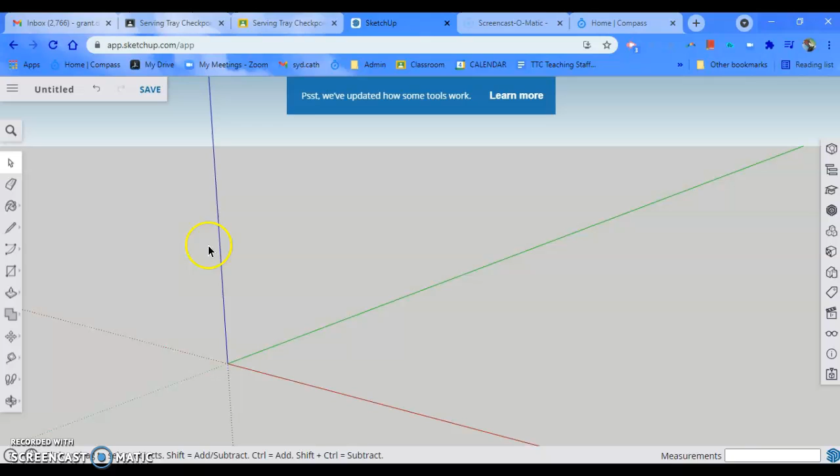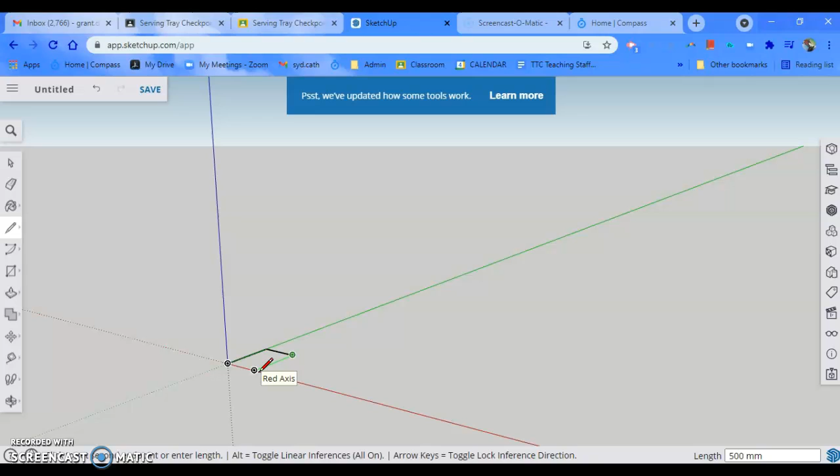We're going to draw a line first, and we'll say that's 500 long, enter. We'll make it 360 wide. You can see the line I've drawn is green, which means it's parallel to the axis, and I can draw that there.

Now I'm sliding my mouse button, but you could alternatively find zoom over here to do that. So, the base is going to be plywood, and it's going to be 3 millimeters. I'm typing in the 3 and pressing enter.

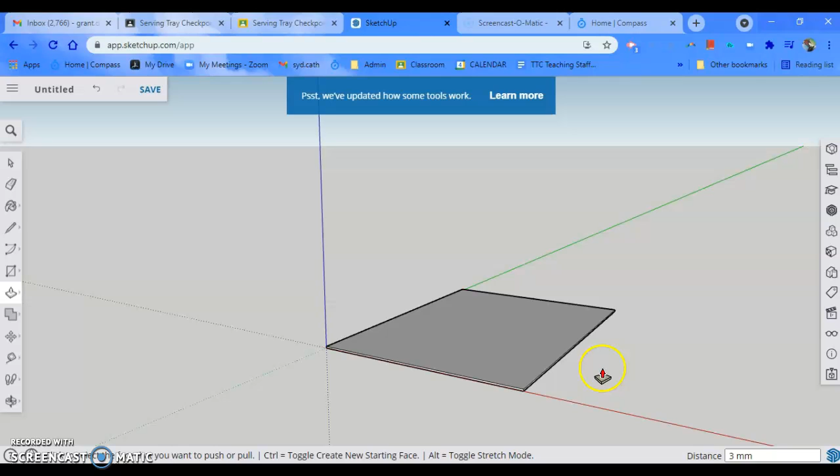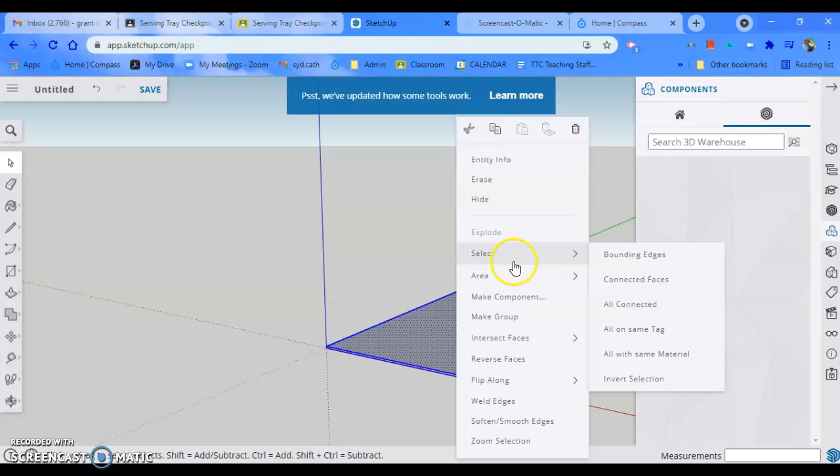Now I'm going to select all of that, right click on my mouse and make a component, and I'll call that the base. By doing that, it means that when I draw on top of it, the things I draw won't stick to it. I can draw separate bits and pieces.

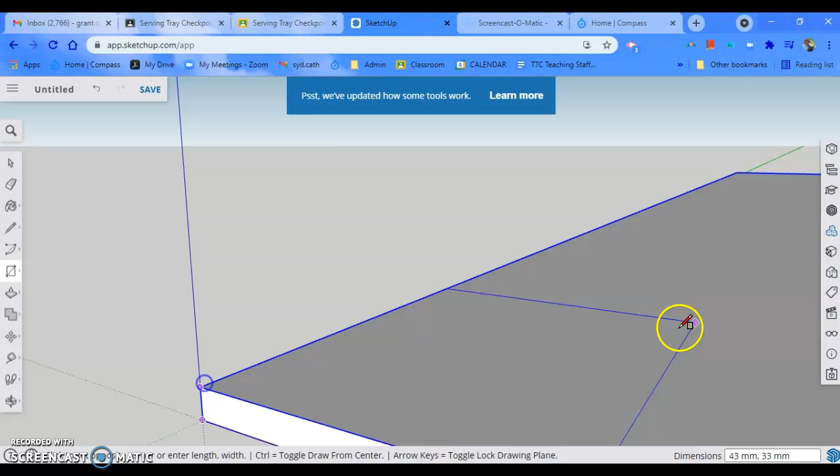So here's my next trick. I'm going to draw on that face like so. And no, that didn't work. Try that again. Right, that's it. And then I will extrude that up.

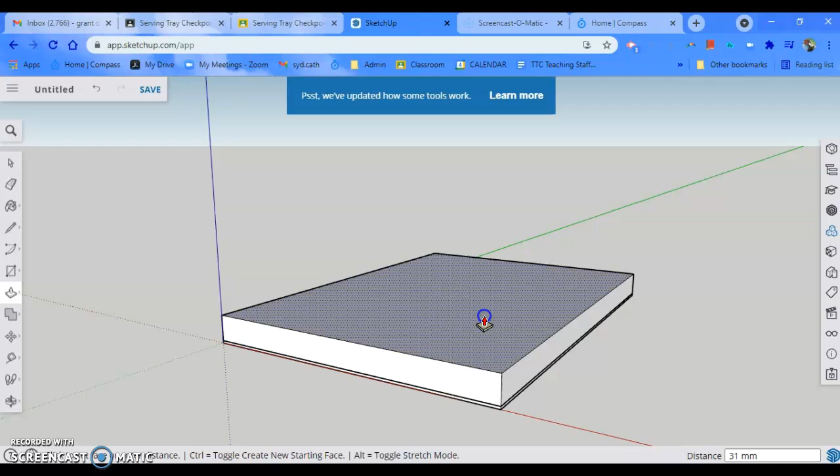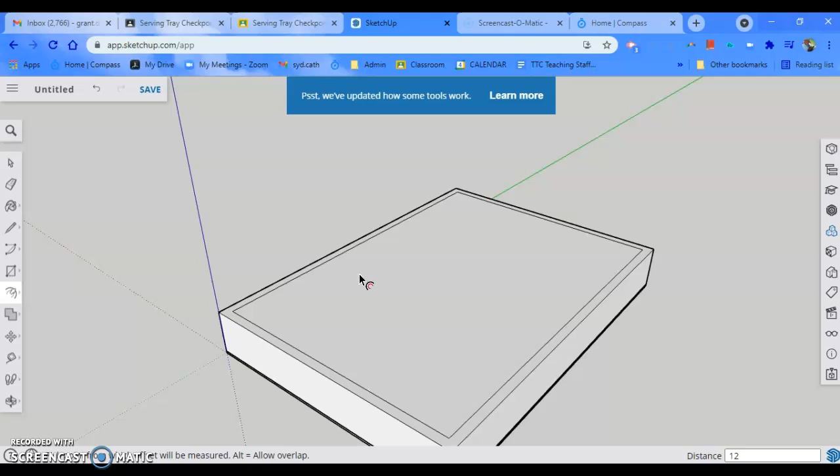We're going to make the sides of ours 60 millimeters, like so. I now have the offset tool, which I just need to find there. Click on that, pull it in, and I'm going to type in 12, which is going to be the thickness of my ply. Then I can select that face and delete, and there's my serving tray.

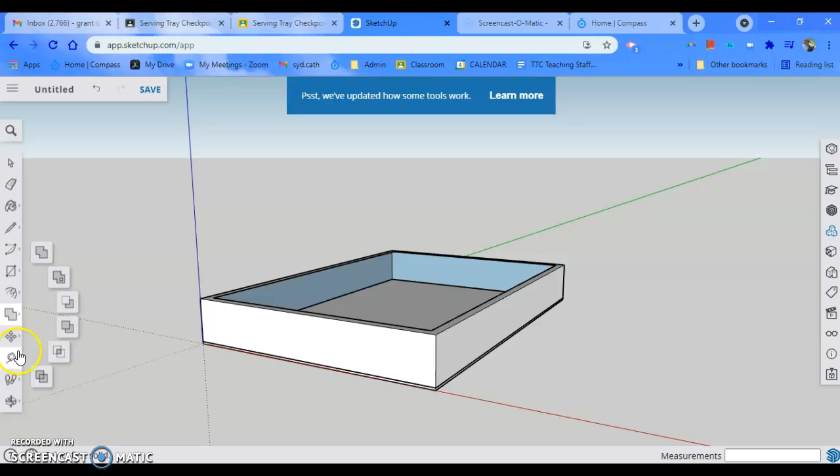Now, to find the next step, I'm looking for a tool that looks like a tape measure. There it is. The line that this draws is a guideline that doesn't print. See how it's gone to the blue dot? That's the center. We'll do the same thing down this way to the center.

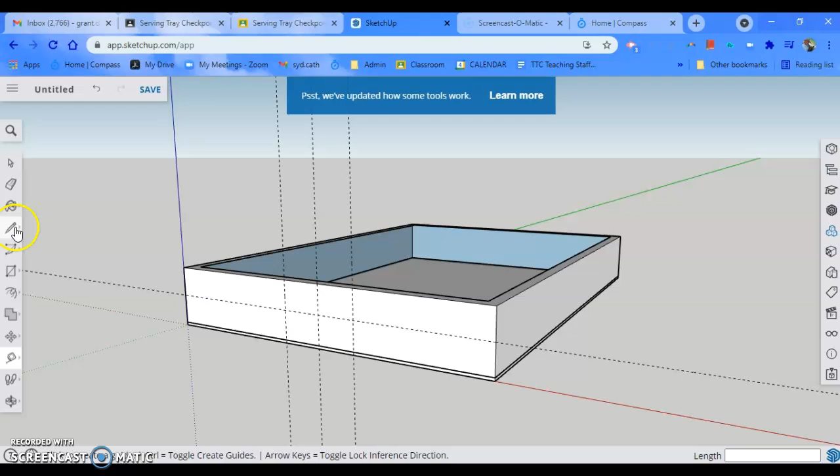Now I'm going to draw out from that 40 millimeters. Now I'm going to draw a circle. There's a circle there, and I'm going to make the circle have a radius of 16, and a radius of 16 there.

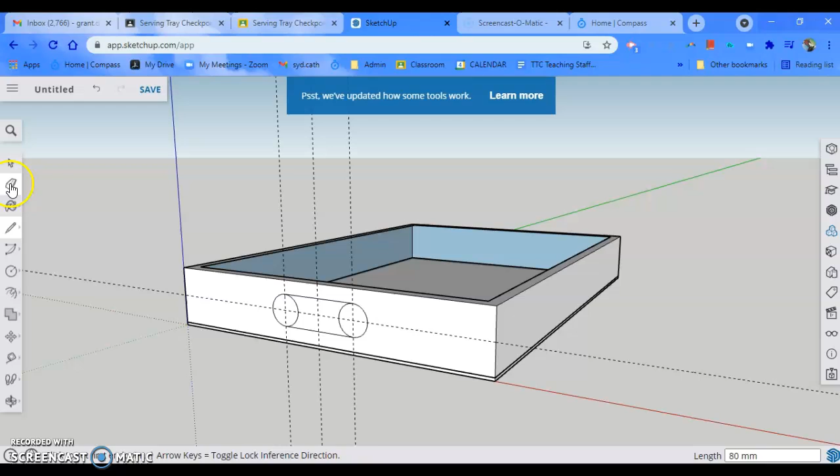I'll draw a line from that top point, which is the tangent, to there, to there, erase everything except the outside, and using my push-pull tool, which is there, I'll make that disappear and select.

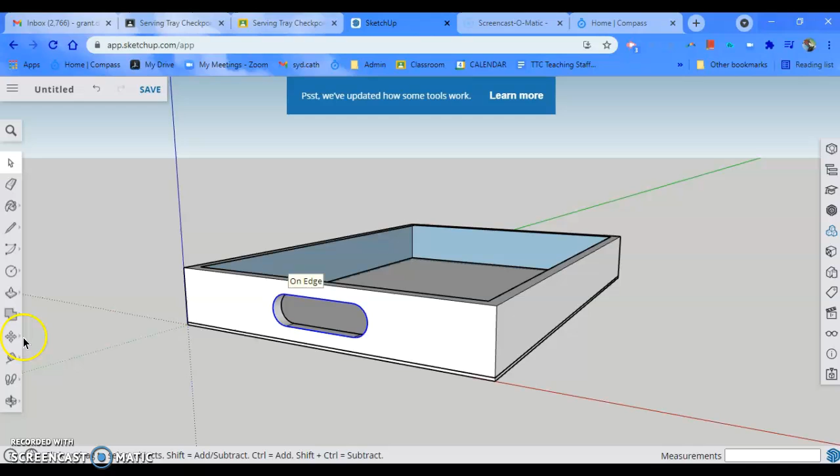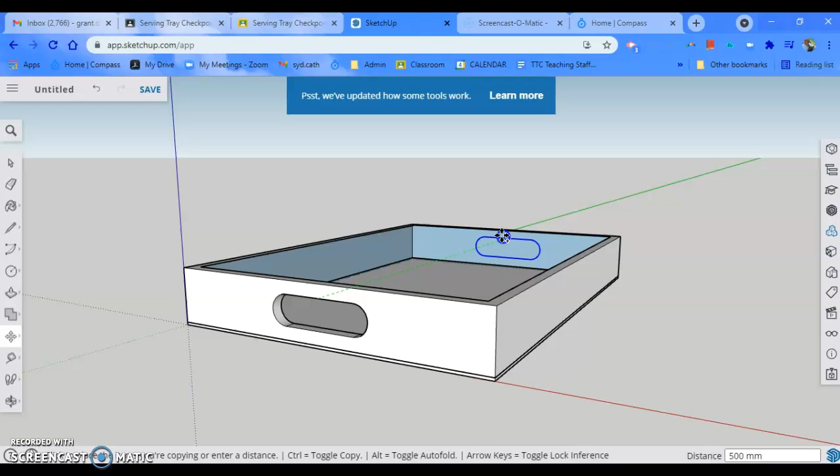Backspace. Okay, so I should be able to select, hold my shift button down, all of that, still holding shift down. I'm going to grab that and move it, and if I press Control, it'll now move that as a copy. It's on the green axis, on the face, on the green axis to there.

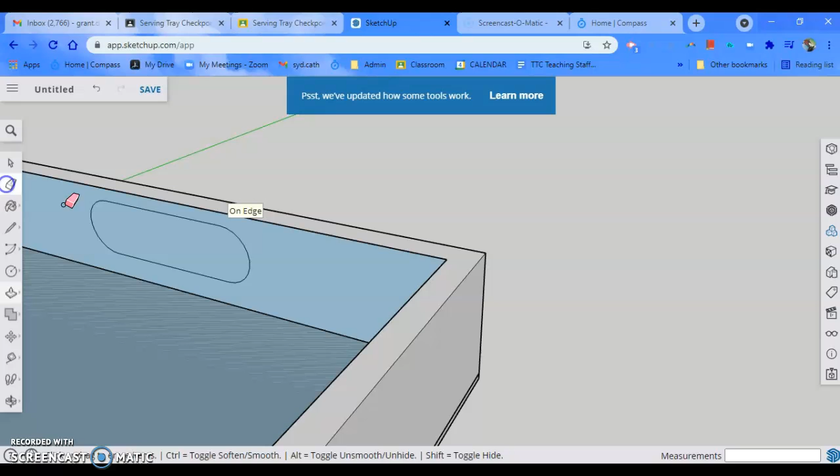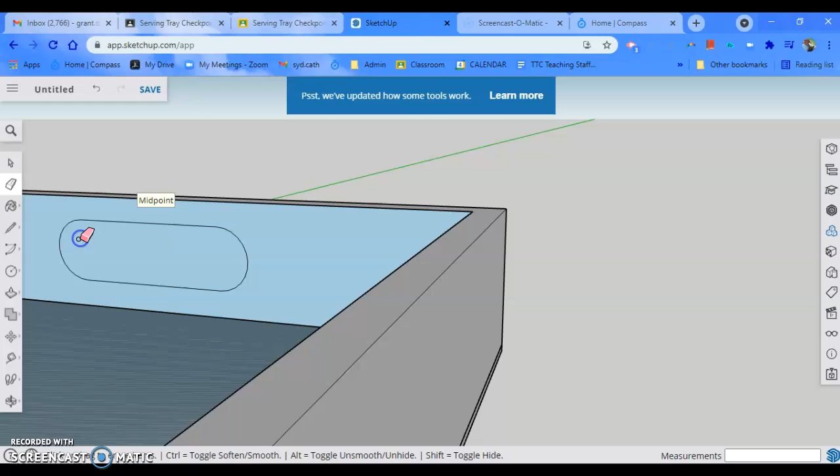I'll click that off, push-pull tool, and we should be able to erase that there. No, why is that not doing that for me? Let's try that again. Push-pull. It's on the back edge.

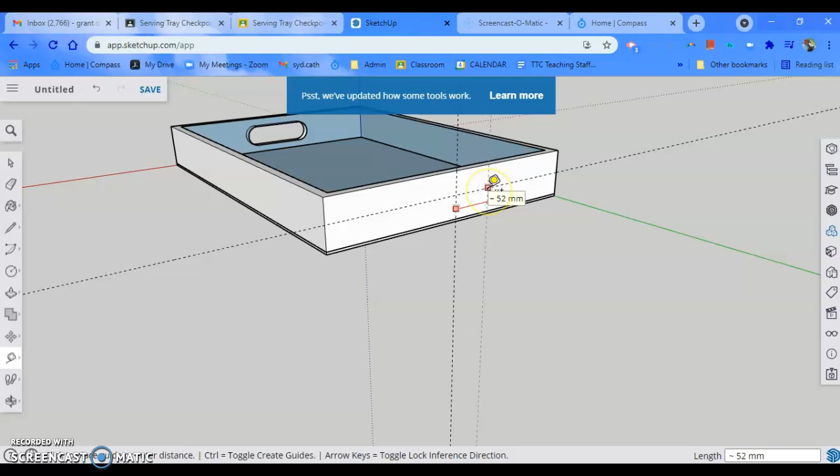Okay, I can't get that to work, so this is what I'm going to do. Same thing. I'll turn that around, just by holding the scroll bar on my mouse. And then tape measure tool. There it is. Find the center, put blue dot. Find the center, blue dot. Off there, 40, enter, off there.

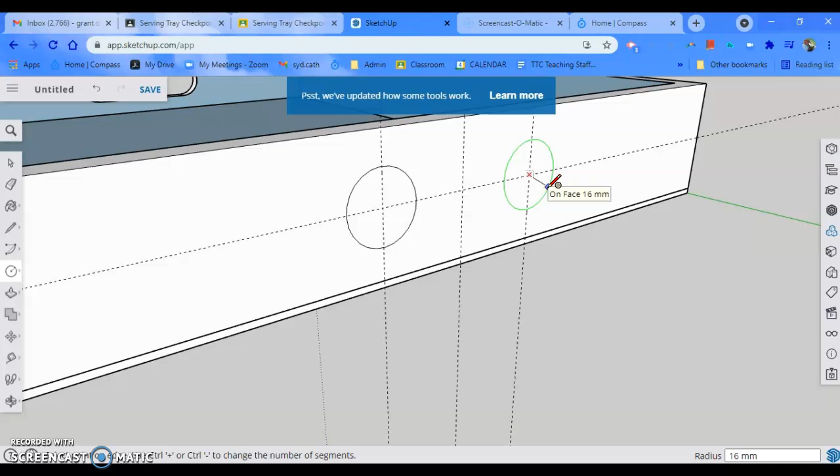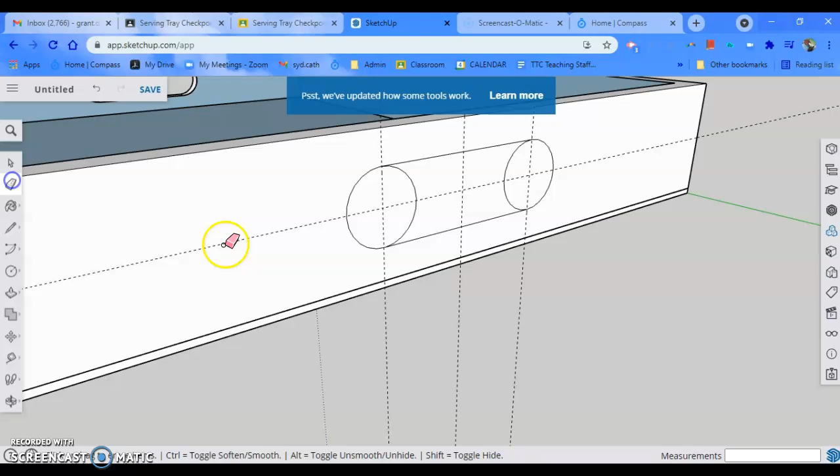That'll now be 80. There. Circle tool. Drag that out, 16, 16. We're going to draw a line from the top point there, and erase all the insides.

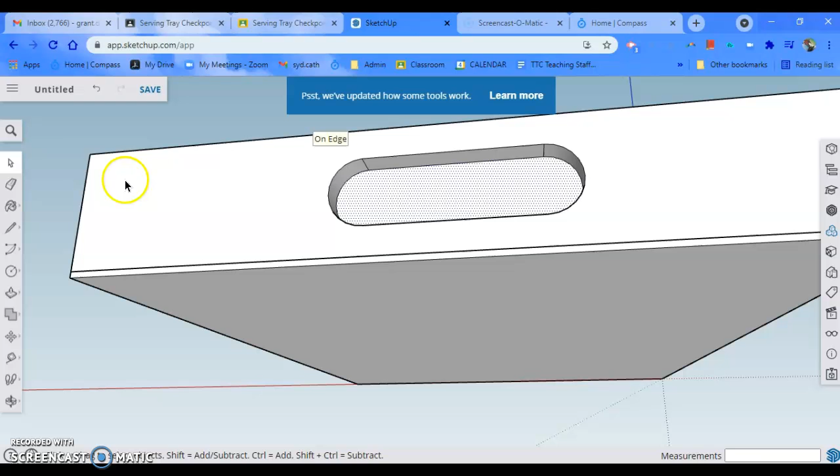Now let's see if I can push-pull that. Yep, okay. That's still giving me a surface inside. I'm not sure why. Oh, I see what's happened. There's no inside on that surface there. You can see carefully, you see how that's showing that the rails are hollow.

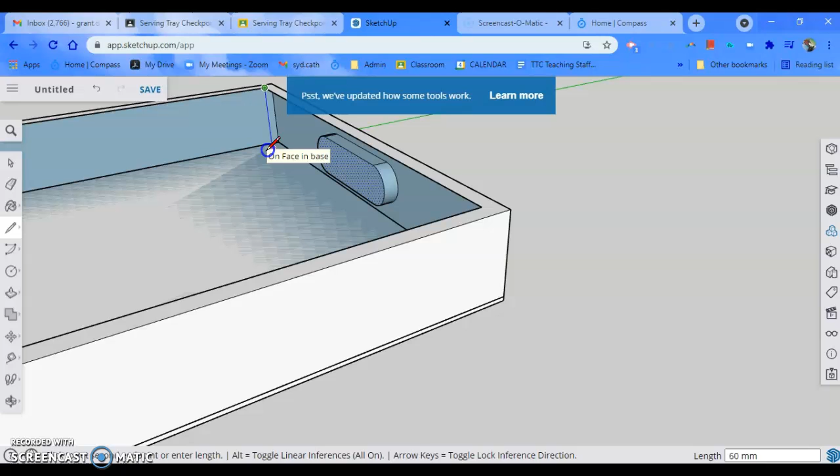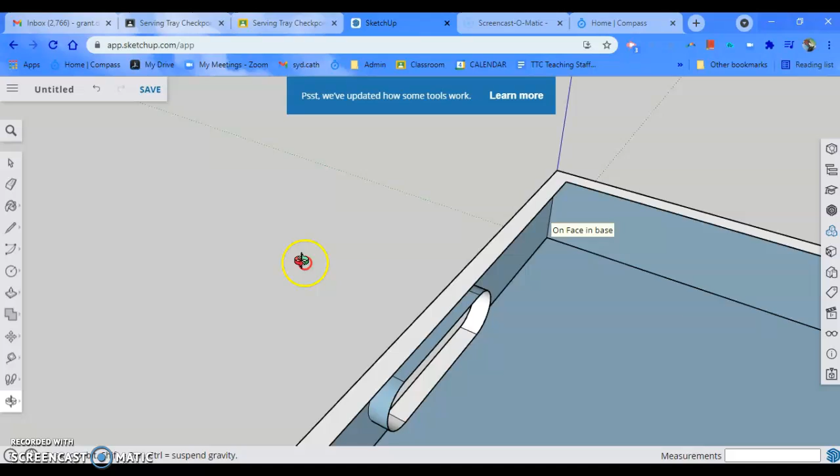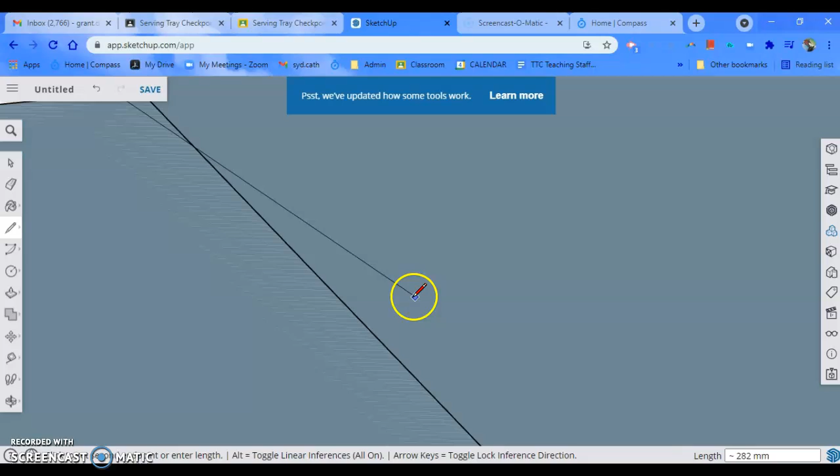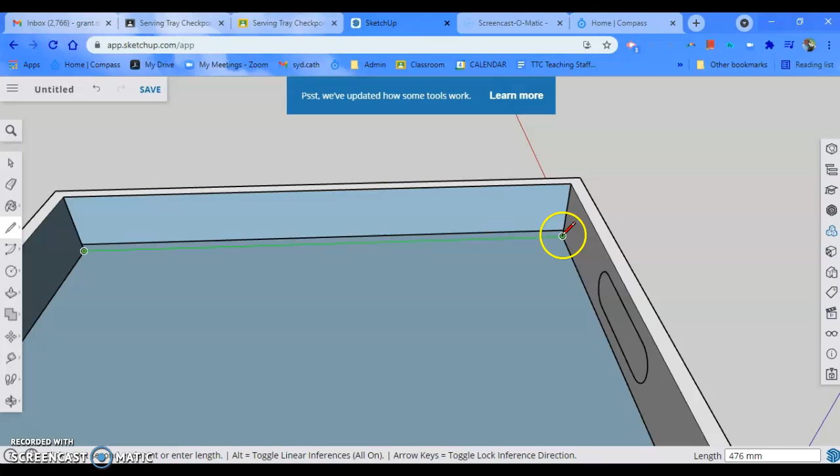So I simply need to drag each of these down. Now, a lot of my movements are done using the mouse. If you don't have a mouse, then just be patient and you will manage to find your way around just using your cursor.

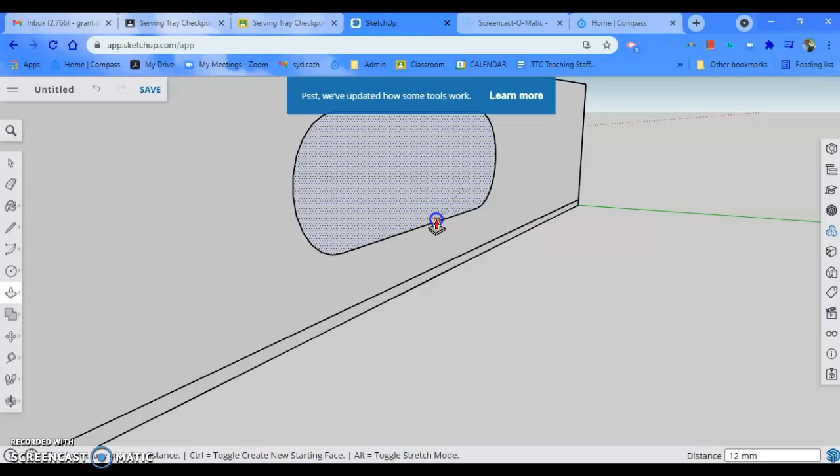That's very strange. Right, I'm going to ignore that. Okay, save. And add a folder. We'll call this the serving tray and create. And that's the serving tray.

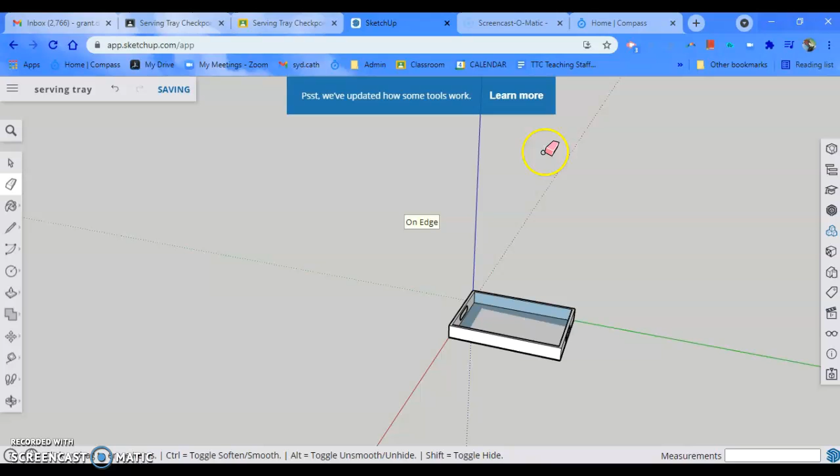Great, now that's it. Back to SketchUp, we've got that saved now. Now, if we were using the professional version, we then export this into another program called Layout.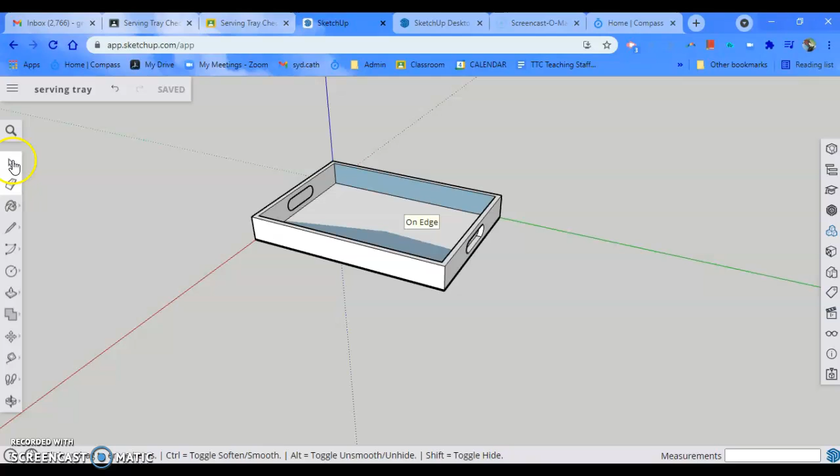But I can simply cheat, and I'll show you what I'm going to do. I'm going to select all of that, and I'm going to make a group, and I'm going to move it like this. I'm going to press Control, and move it like that.

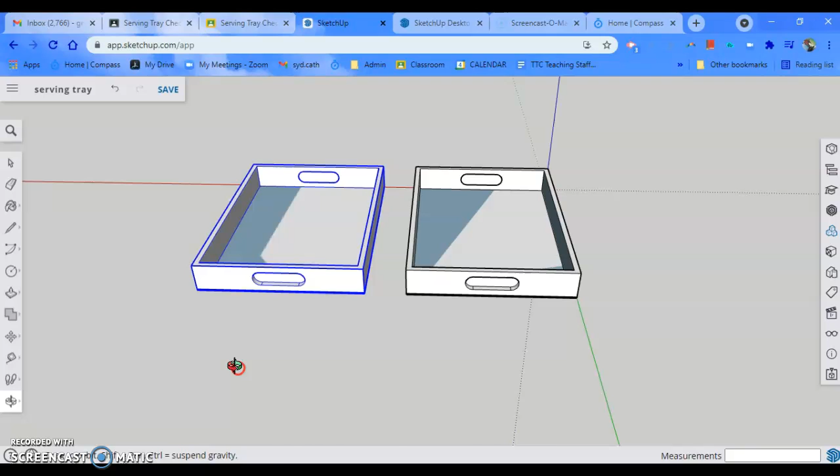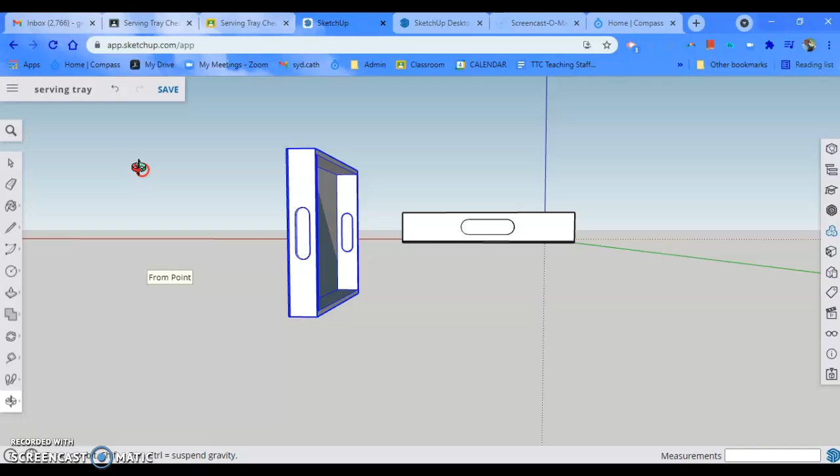Then I'm going to rotate it, which uses this button here, rotate, and all we need to do is click on that, turn it over like so, and then I want to move it down so that those two are in line. So I'm going to click there, that point there, like so.

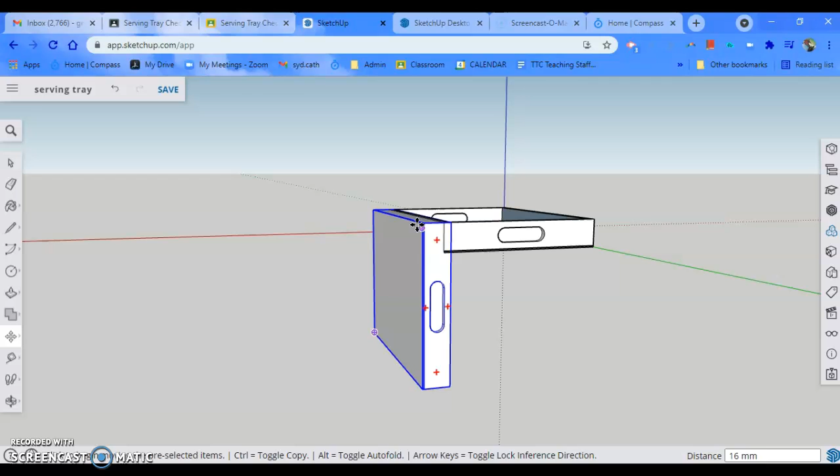And drag it out like that. Right, so I'm going to change my view around, so I'm looking at it like that. Okay, so I can see the top and the front. The other way that we could do that is slide down here.

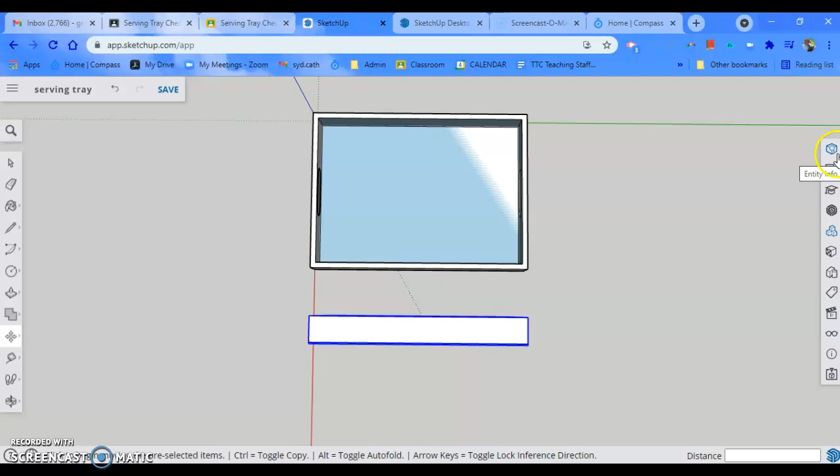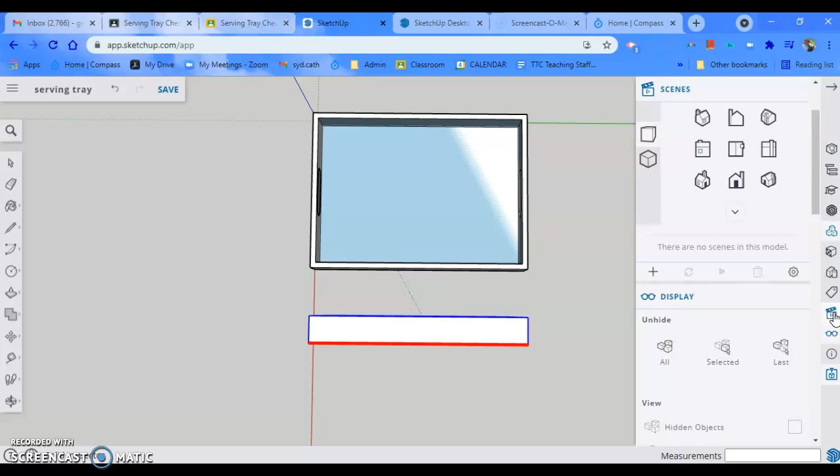Nope. There. Top view there, like so. And I'm going to click this button, which is going to be parallel. So there we go. Okay, so now we are seeing it from the top and from the side.

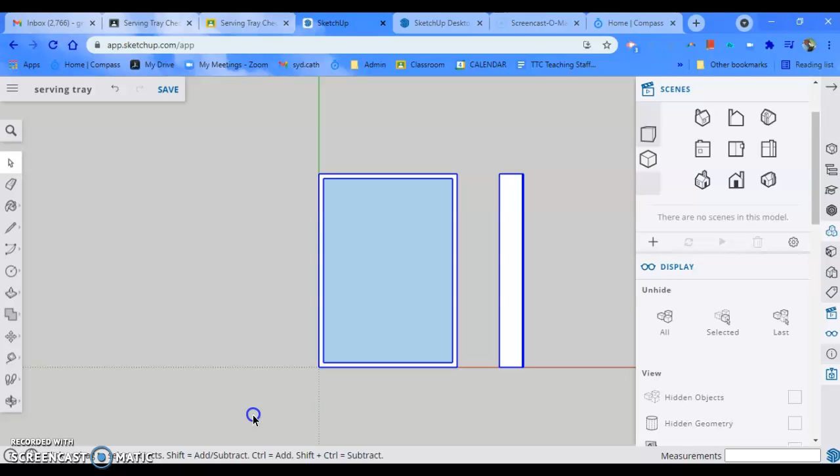Select all of those. Rotate. There. Now we have top view on top and the front view there. Okay, so the next thing we need to do is to find how to put some dimensions in.

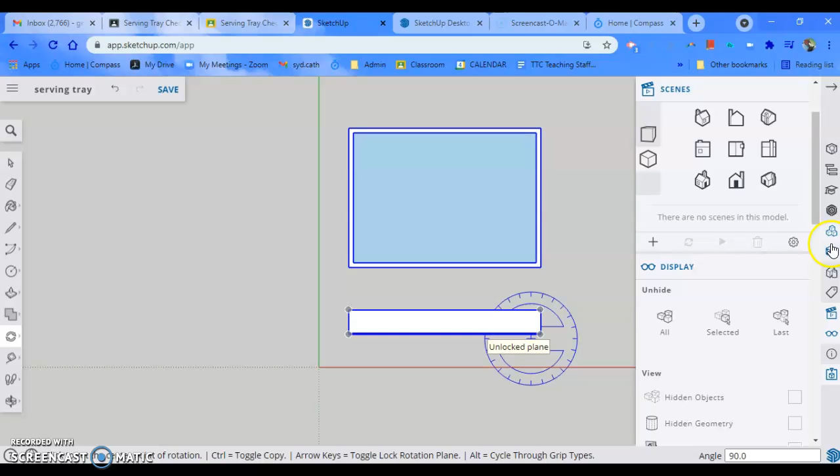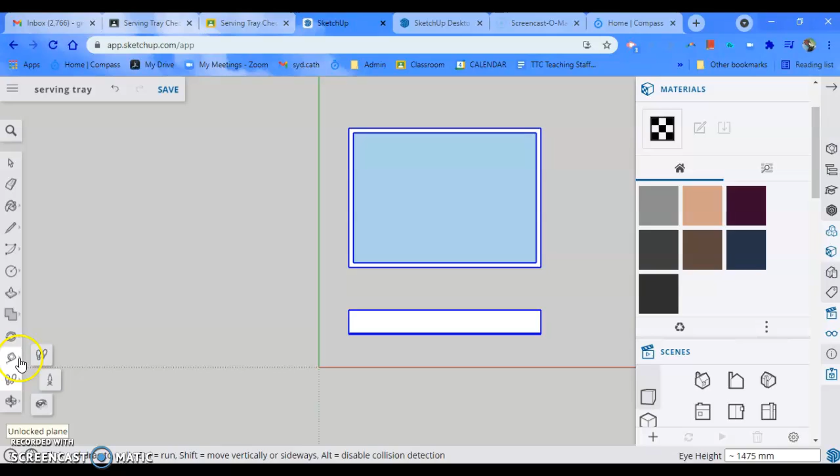So I'm just clicking through here, hunting for the dimensions. So let's see here if I can see where to put dimensions in. I just use these flyouts. Not there, not there, and there's my dimensions.

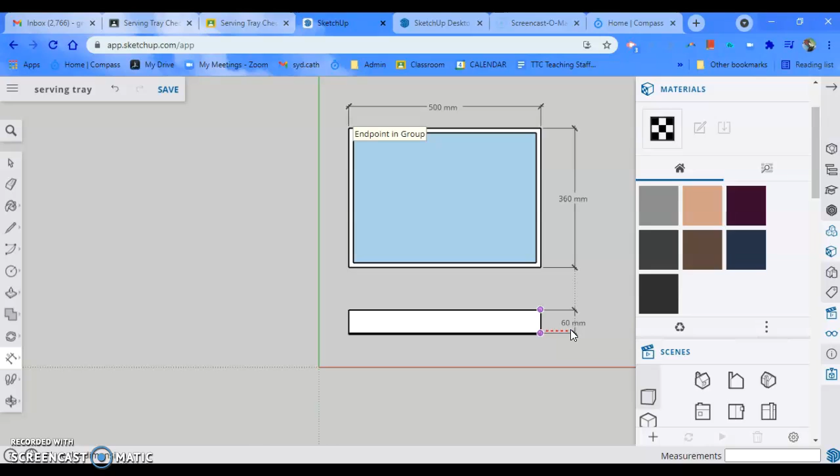So, 500 by 360 by 60 by 3. And there's your working drawing.

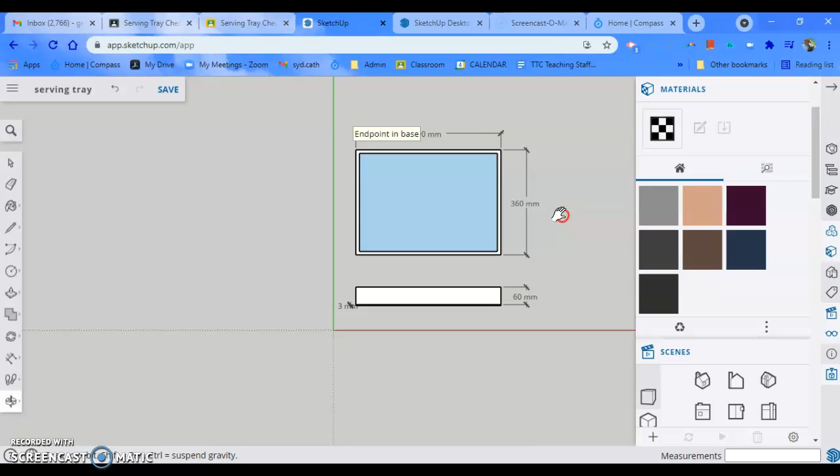Now I'll do a screenshot of that, and I can then paste that straight into my Google Sheet. If you want to, you can save it as a capture on there, and we will just call that working drawing. So that would be the second part that you would do on that task 2.

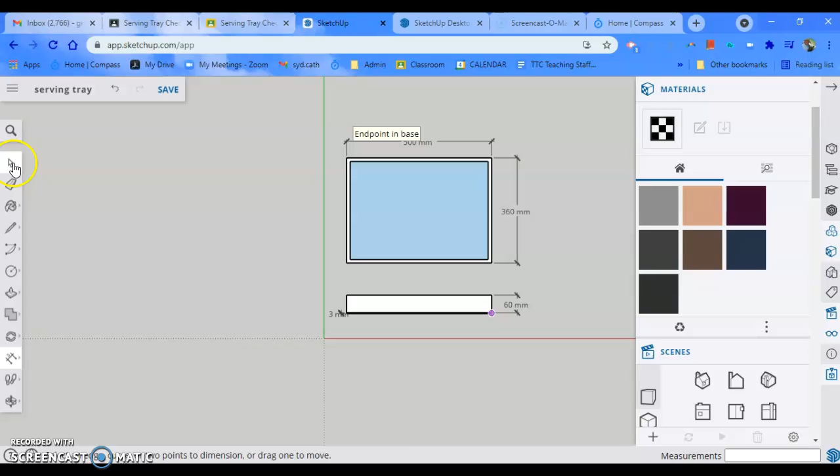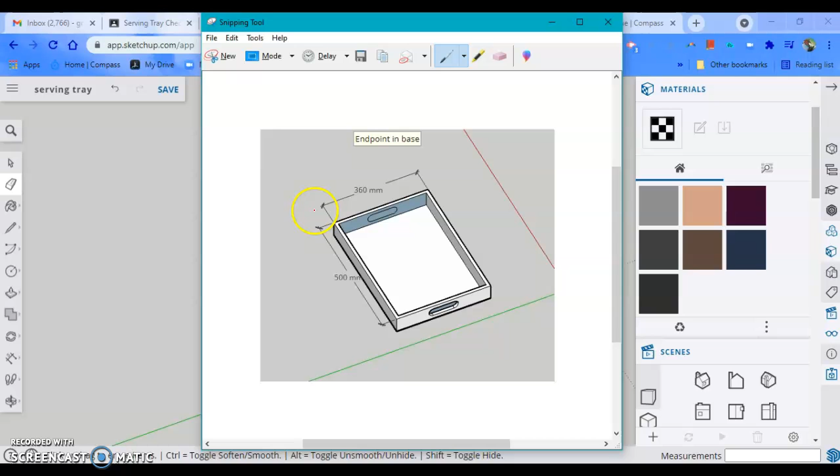Now for the whole sheet itself, then you could simply delete this and screenshot that, and paste that into your Google document for task 2. Good luck.

I'll call that an ISO.